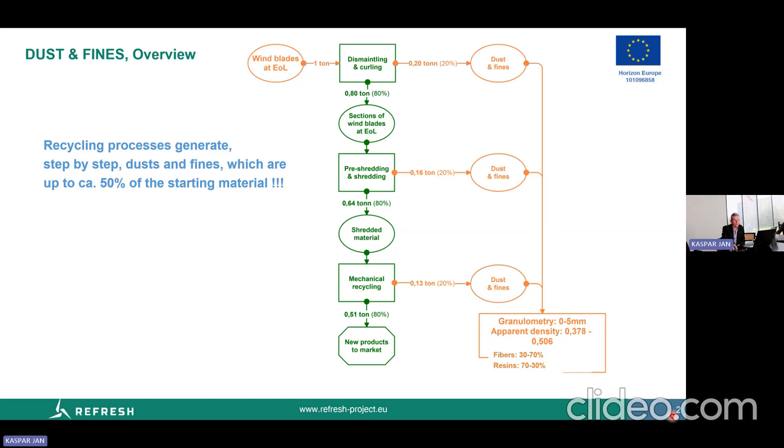I'm from Enecolab, and our work concerns the thermochemical treatment of dust and fines. Why is this important within our project? The point is that within our project, starting from the wind blades, we find that there is a lot of production of dust and fines in every part of our processing, which means that up to 50% of the starting material is essentially material which is difficult to treat and which, of course, needs to attain some valorization.

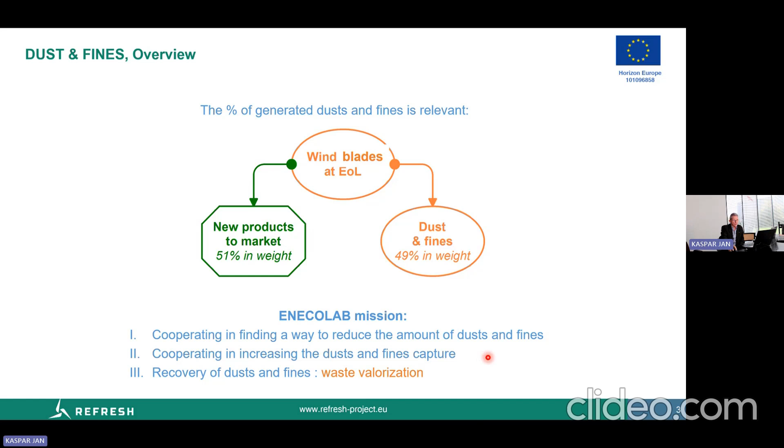So our mission in this project was to find a way to minimize the dust and fines production, because this is essentially one of the most important problems in this processing, and then their capture. And the third point, which I'll be talking about today, is the waste valorization in terms of energy. So let me go with what is there now.

Normally, as has already been said, dust and fines presently are either used in cement factories, for example in France it is quite widespread, or landfilled, which of course is undesirable. As an alternative, we have just heard about chemolysis or some thermochemical processes. Those thermochemical processes so far discussed have been batch processes, whereas in our case, we work on a continuous process.

So essentially what we do is take some waste. Of course, the process is tuned in this project towards our dust and fines, but it could possibly be any kind of waste which has a significant organic portion. We pre-treat it and move it into a reactor, which is a pyrolysis reactor. And eventually there is a post-treatment.

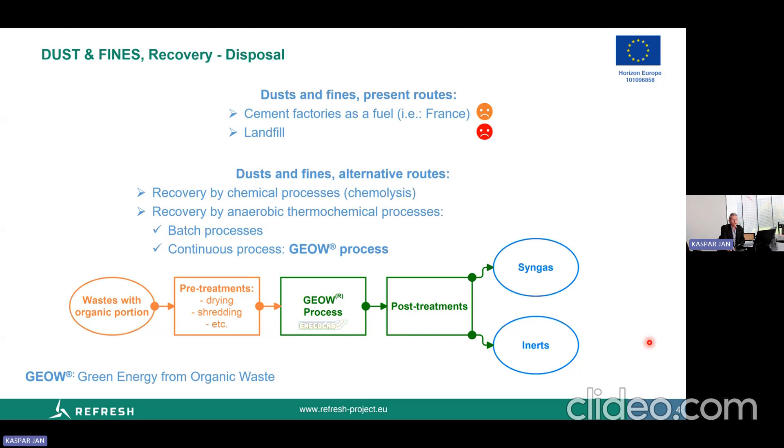The main product we are interested in is the syngas. The reason is that production of oils normally leads to complex mixtures, which for application may need to be separated. Whereas syngas is quite an effective energy carrier, and this is what we want to do. The second aspect is that during this process we obtain inertization, so we can have even a toxic waste which may end up as a non-toxic waste, which can be discharged.

So what essentially we do is a high temperature pyrolysis. We can work in the temperature range between 800 and 1,000 degrees. And the main product we want to produce is the syngas, which eventually can be purified and used as a syngas, or simply burned and used for heating or for electricity generation.

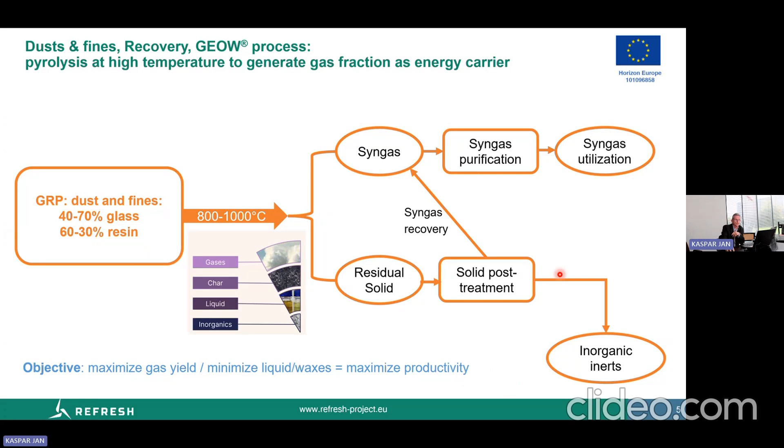The residual solid might be post-treated, because normally we have gases, char, liquids, and inorganics produced by a pyrolysis process. And of course, under our conditions, what we want to minimize is the liquid production, and possibly the char as well. So these are the objectives of our project: to obtain energy, to obtain an energy carrier.

So clearly, within this project, we have quite a number of problems and quite a number of variables under investigation, and effectively we are just optimizing our process. At first we had to resolve many problems due, for example, to transport of the materials, because the apparent density is sometimes very low, which means that you need an effective transport within the continuous reactor.

We have to find the appropriate conditions, because the proportion of fibers and resins is quite variable. As I have shown before, it may be between 30 and 70%, so very large variation. And of course, the amount of gas produced is strongly dependent on this proportion. Clearly, the kind of resin also impacts the calorific value, and there are also some process parameters which we are optimizing.

What you see here is a table which reports some examples from a laboratory scale, which can process a kilogram of samples, and an industrial scale of our reactor, which I will show you next. And you can see that essentially we have quite a significant part of CO2, because this arises from the oxygen contained in the starting polymers and the resins, but a reasonably appreciable CO and calorific value is obtained in this project.

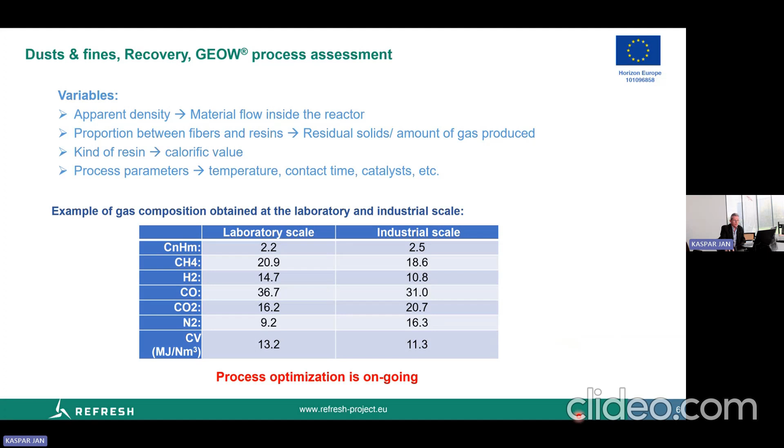If I show you, the reactor is quite small. This is a reactor capable of treating up to 20 kilograms per hour of material. These reactors can be made modular, and for example we are working on parallel projects where 10 of these reactors are used in parallel and can process tons and tons of material per day.

And essentially, what is important in all the discussion is that we have at this point a gasification efficiency of about 0.2 to 0.3 cubic meters per kilogram of material. But the important thing, I think, is that we obtain a significantly higher amount of energy from the gases produced. We don't consider the energy content of the char coming out of the reactor, which can then be treated under oxidative conditions to generate further heat, which is quite high.

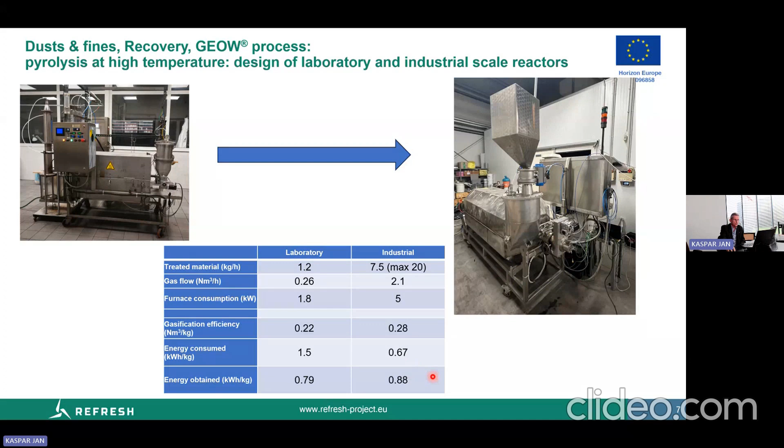But these values, to be honest, are quite low in this case, because we have been using materials which have a relatively low carbon content. When we start from some other materials, we can obtain an energy which is even about twice that employed for our treatment.

So, coming to the summary, I think we have shown that this pyrolysis reaction is able to convert these materials and obtain syngas, which is a useful energy carrier. Preliminary results, not optimized ones, clearly show that the amount of energy recovered exceeds that used in the high temperature treatment. And essentially, the idea of the project is that it is designed to be integrated within an industrial process.

This is an important aspect, because as long as you move the waste of your product within the process, it's not classified as waste. The waste will be the final product of our process, which, however, we can inertize, even toxic materials. And most importantly, we recover an exceeding value of the energy content.